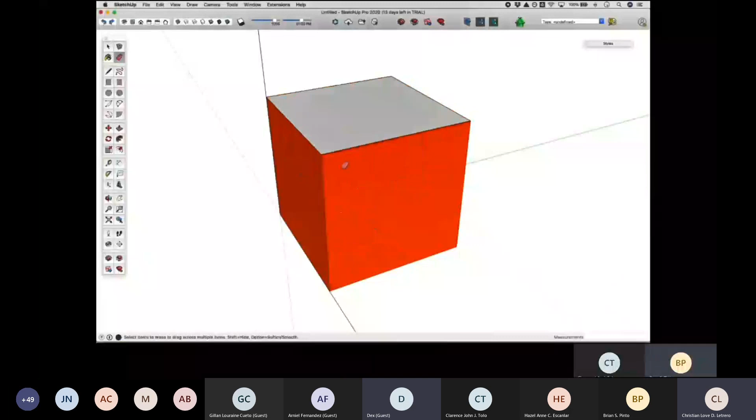Some of you are very familiar with this logo, the red logo of SketchUp. One of the big changes of SketchUp is actually rebranding its image and changing the logo. Now, some of you might consider it to be a very risky move. Why would you want to change something familiar that we've grown to know for the last 8 years?

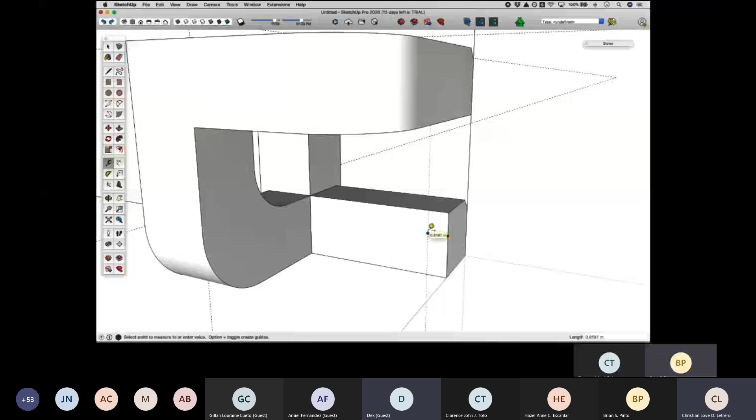I don't know if everyone's familiar, but SketchUp is actually part of a bigger company called Trimble, very known for its constructible and building products. The blue is actually from Trimble, and that's why the new logo of SketchUp is blue, to relate to the bigger company of Trimble. So as you can see, it's still very simple, but it's more edgy and forward looking, just like how SketchUp wants to be.

There has been a big comment from people that the logo inside the axes, what you can see on the screen when you start modeling in SketchUp, is actually 2D. So it's funny that the logo of the 3D modeler is 2D. So the logo we showed earlier can actually already be edited in the axes in 3D. As you know, when you start in the axes, there was a guy there previously when you start your model. He has now been replaced by Sumele Aruofor.

She is actually the enterprise marketing manager of Trimble, specifically SketchUp. So now Sumele will be greeting you every time you open the software and start modeling in the axes.

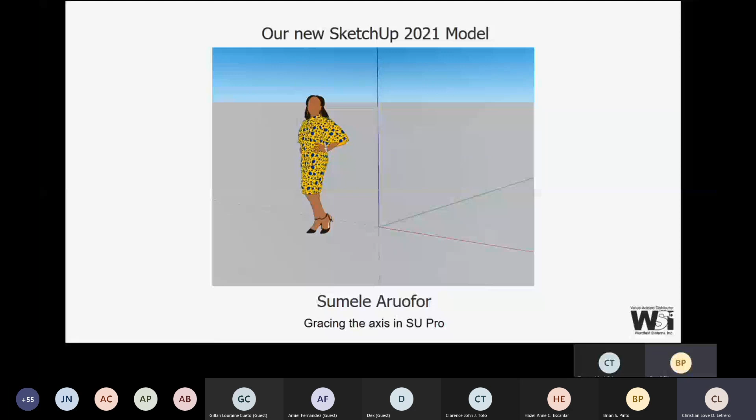One of the things that SketchUp has really tried over the past few years was to build more value for you, for its clients. Before, we were just focused on using the 3D modeler. But did you know, and I hope you know, or if not, you'll know after this webinar, that it's not just the 3D modeler anymore. There's an entire ecosystem that Trimble SketchUp is really building for you.

So aside from the Pro, there's the Style Builder, there's the SketchUp Viewer. You can also do 2D drawings and layout, and you can use the support of 3D Warehouse and Extension Warehouse to improve your designs. And for collaboration, we have Trimble Connect. This year, the new feature is really Predesign, which will really help you prepare your models by laying the foundations before you build your models.

Again, I mentioned this, although SketchUp has been existing since 1999, it was actually founded by @Last, and then it was acquired by Google. A lot of you still think SketchUp is Google SketchUp, but in 2012, actually the big company Trimble acquired it, and that's where it rebrands now, and that's why we're aligning to the blue logo.

So, without staying too long, I just want to welcome you again to a new SketchUp, a better SketchUp, a bluer SketchUp you might say. We hope that you stay and be attentive to what's gonna come next, because we're gonna explain to you all the new features, the new licensing policies, and we hope that you learn something from this. All right, once again, I'm Oliver Ko.

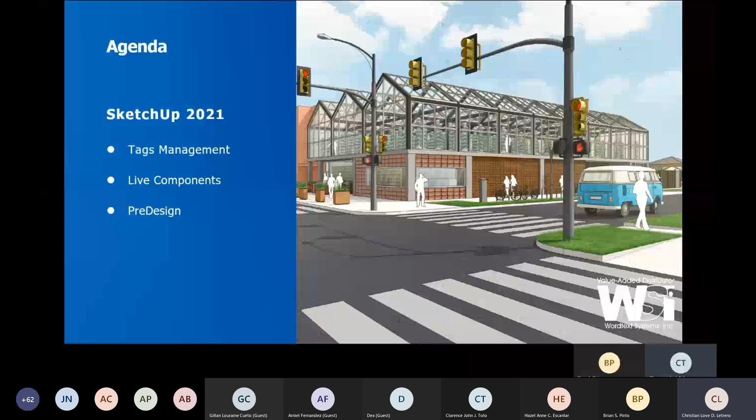So what's our agenda for today? SketchUp 2021 will give you three major updates: improved tags management, live components, as well as pre-design. I'm very excited to share this with you guys kasi mapapabilis na yung pag-create niyo ng models because of these new major updates of SketchUp. It will save more of your time and it will now manage large complex models. You will explore designs faster as well and identify what design or strategies you can use when creating your projects.

So I'm excited to share to you guys the improved tags management. How does it work? Let me show you my screen into SketchUp.

Let me work on that, let me hide that. Okay, so as you can see at my tags panel, if you are a SketchUp 2020 user, you will notice first there's no longer the delete tags button here. So when you want to delete tags, you just click on it, right click, and then delete tag manually.

So first thing first is the add tag folder. You'll notice there's a new icon, the add tag folder, that will create folders inside your tags panel. When you click that and type the name of your folder, it will go like this, and you can actually hide all the tags inside the folders, so it will look more organized than before. One thing you can use inside the tags folders: when you click all available tags, let's click roof and shift up to the last one of roof, and the add tag folder, it will go directly inside the tag automatically.

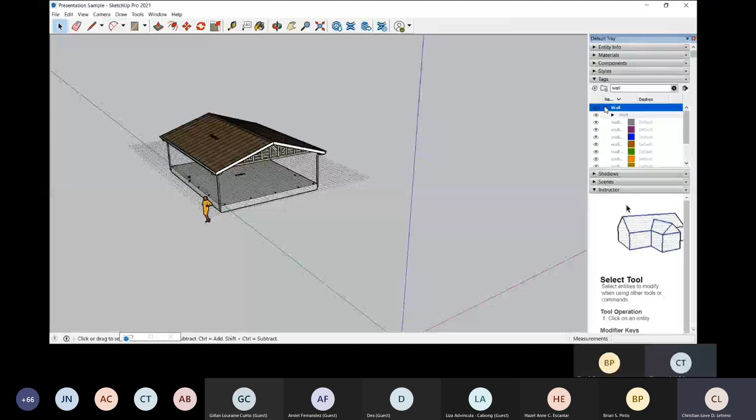And another thing na mas maganda dito is the capability to filter tags when you type your desired tags inside the search bar. So when you type roof, or let's type wall, it will show all the wall tag folders and all the tags inside those folders. Mas madali niyo na siyang mahanap when you are creating your projects with a large amount of tags inside the tags panel.

The second one is the live components.

Okay, let me show you my screen first. Let's wait for a bit.

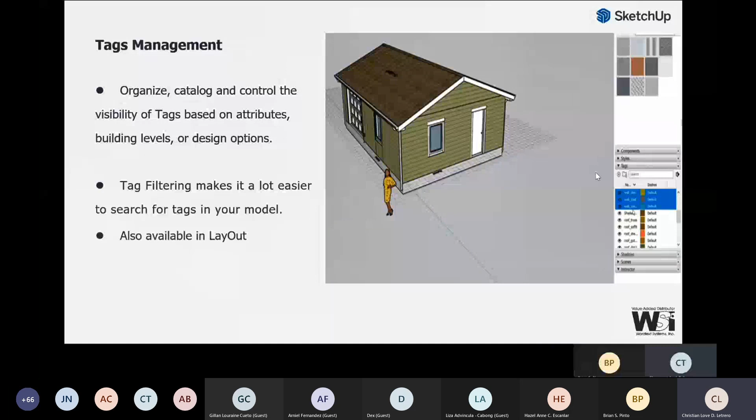I'm very excited with this one since this will help you guys improve more your components inside the 3D warehouse. So how does it work?

Live components are components that you can configure live directly inside the 3D warehouse. Since we say live, it requires internet connectivity so you can configure it inside your models, or inside SketchUp rather. Let me show you guys how to use this one. Let me share my screen again.

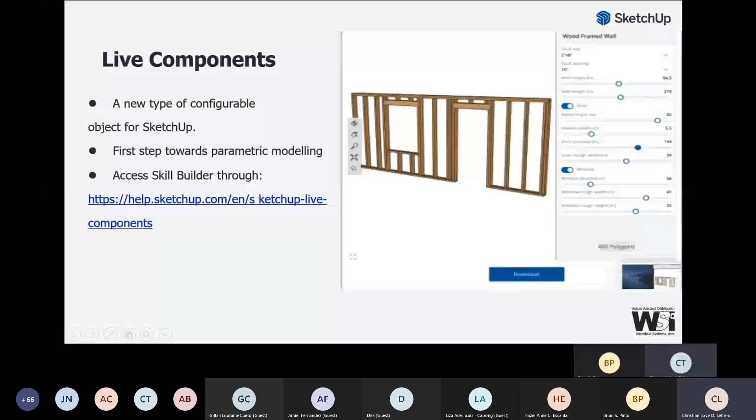When you download the live components, you can right click on it, configure live components, and there's a window pop up where you can adjust the components. Let's wait for a while, since come on guys, we're in the Philippines.

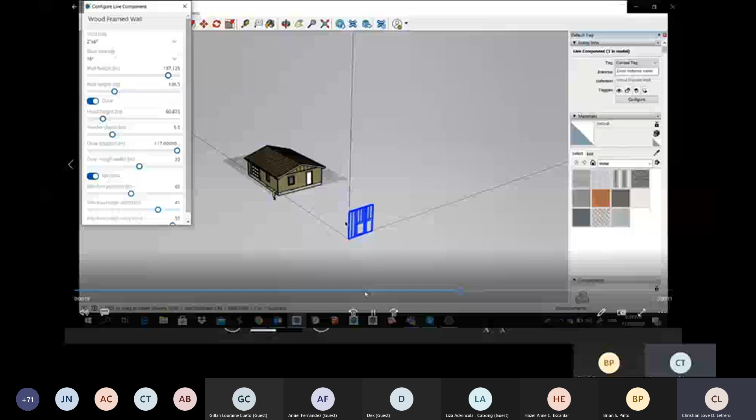As you can see, I adjust the sliders inside of it, and it goes directly inside your SketchUp or inside the components. Let's adjust the door rough, the door position, and that's why it can save time using the live components.

So last but not the least is Predesign. So what is Predesign? It's a web-based app that you can use.

It will take the project location and assess the average climate data for that location. It will also provide suggestions, like what window types to use, what types of shading solutions to use, or how you can maximize your outside spaces, your top lighting, as well as the architectural response to your project.

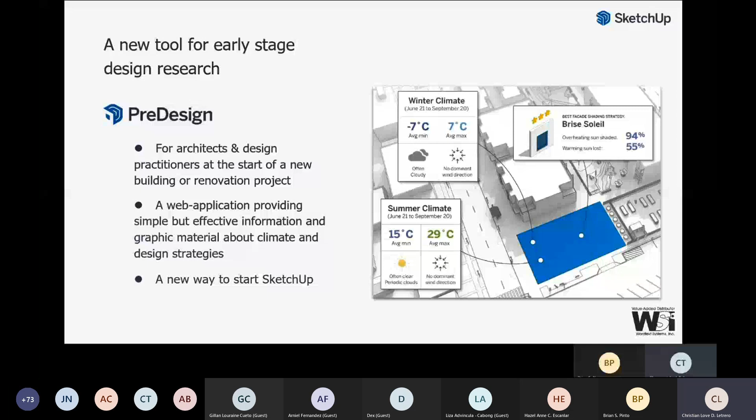Imagine that, guys, you are Mario. We all love Mario, right? So you are Mario embarking on your new model with no idea yet on your strategies. Predesign will be the fire flower that you will acquire inside SketchUp. Imagine you are Mario, then you get the fire flower. After that, you are now ready, or well equipped, and you know how to start your model. You have the suggestions, you have the ideas on how to jump right into your model.

So Predesign will affect the whole ecosystem inside SketchUp. If you decide to use Predesign, you can go directly to 3D Warehouse and find components for your strategies before starting your drawing. Or you can go directly to SketchUp before creating your models to get insight on how to start your project or design. You can also generate a report from Predesign into Layout.

So last is which SketchUp users get access to Predesign. This will be your battle card, guys, especially if you are perpetual license users of SketchUp. I'm sorry to tell you that you don't have access to Predesign, but we will discuss later how you can get access to it by subscribing to SketchUp.

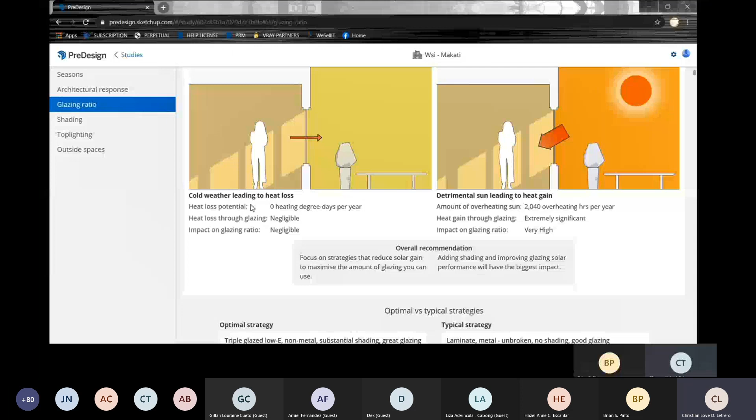Now here you go. Glazing ratio, select each orientation, as I said, of the building and see 2 of the major negative effects. We are facing south, and the factors affecting glazing ratio are cold weather leading to heat loss, or detrimental sun leading to heat gain. The amount of overheating sun is 2040 overheating hours per year, and heat loss potential is 0 heating degree days per year. So it will give us the overall recommendation, like focus on strategies that reduce solar gain to maximize the amount of glazing you can use.

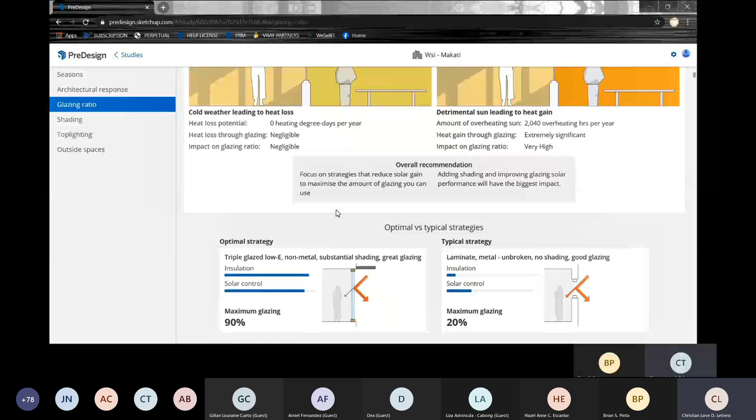It will give you the glazing strategies that you can use, like this one. Optimal versus typical strategies will give you 90% maximum glazing or 20% maximum glazing. You can also filter all the glazing available that will fit into your models.

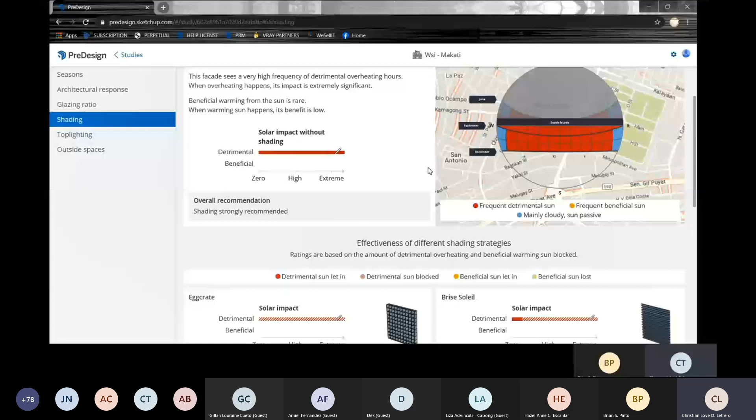The next thing is the shading. What is shading? Shading shows each face of the building, and this image shows where the sun will be at certain times of the day and certain times of the year, and it will tell you the effects of the sun inside the building.

Imagine that this is inside your building, and it will face directly to the south, southwest, west, or northwest, and it suggests different kinds of windows or types of shading that you can use inside your models. Like this one is the eggcrate, which has a 3 star rating, the automated lines, the brise soleil, and global overhang, which is a 2 star rating.

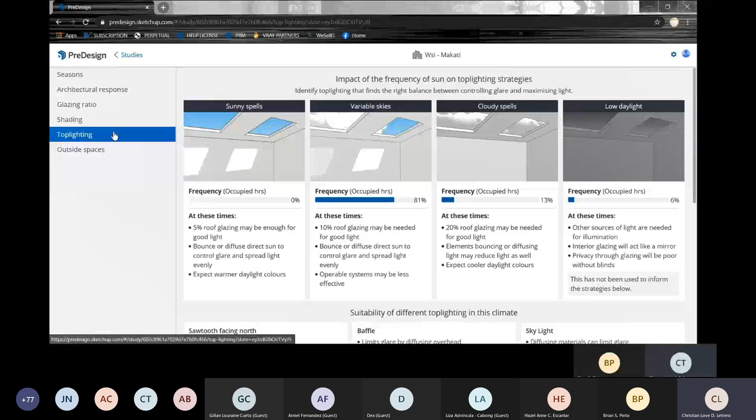The next one is top lighting. This solution gives different skylight recommendations. As you can see on my screen, it has a frequency of 81% variable skies, so at these times 10% roof glazing may be needed for good light. It will give you strategies or ideas suitable to different top lighting options in this climate, like sawtooth facing north, baffle, skylight, or light pipe, which has a 2 star rating.

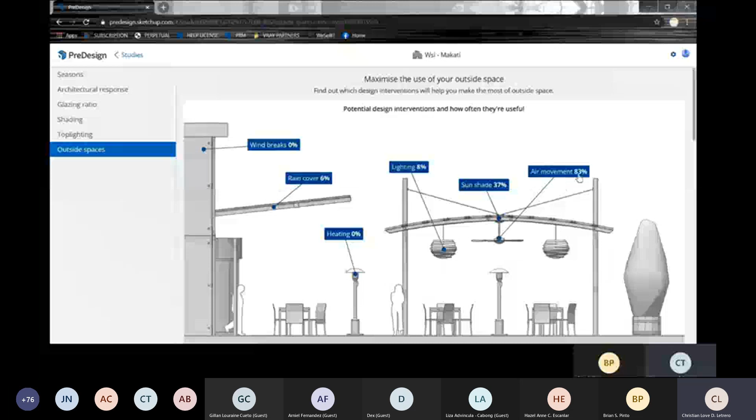For the last one, outside spaces, or how you can maximize your outside spaces by creating sunshade, which is effectively 37%, or air movement, which is effectively 83%, and lighting up to 8%. If you are more into graphics, this will show usability of the outside space across the year. The green ones are usable without interventions, and usable with all the interventions.

You can scroll down further and you will see the best combinations of 4 interventions, which is 86% effective, or the best combination of 3 interventions, which has 80% effectivity. So that's it guys, that's all for the pre-design. Let's go back to our topic.

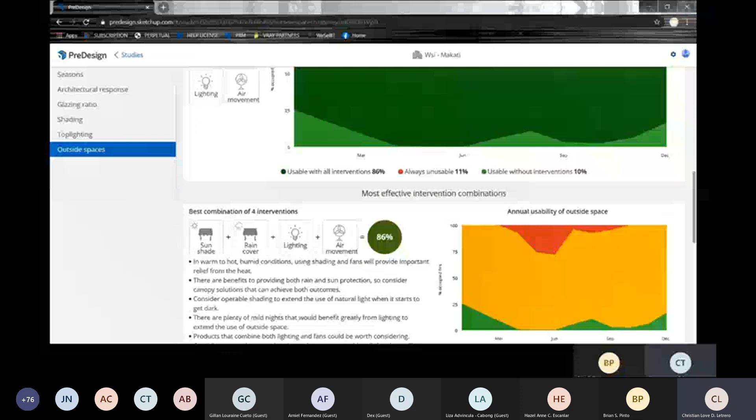So that's it, that's all the new features of SketchUp 2021, our new normal. What do you guys think of it? If you have any questions, you can type right below or in the chat panel, and we will answer it later after the discussions. Thank you guys.